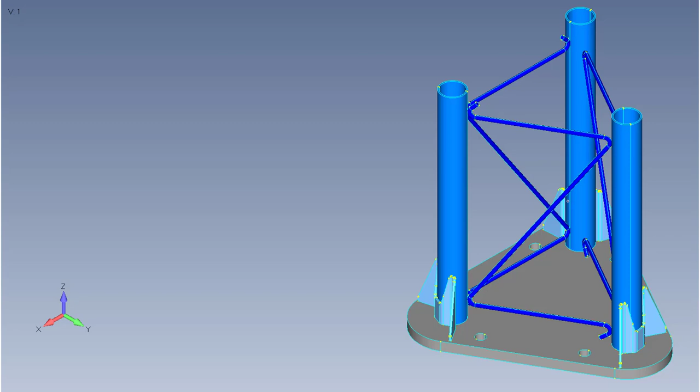In this video, I'm going to run through setting up a radio tower model. I've already imported the geometry. It consists of a solid base plate, some gusset plates that are welded to vertical tubes, and then a solid circular bar cross member that goes to each of the tubes.

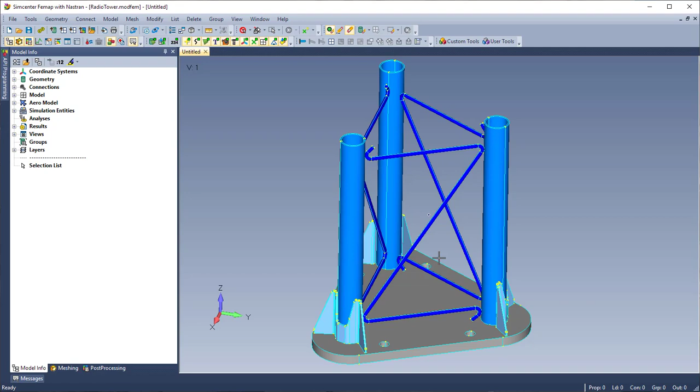So I'm going to mesh what you see here with different techniques, and then what I'm going to do is copy the mesh in the positive Z direction to get the length that I need.

The first thing I'm going to do is use the meshing toolbox to add washers on the holes of the base plate where the anchor bolts will be. I'm going to align the splits of the washers tangentially to the curves on the outside of the solid here, and this is going to help when I mesh later. I'll get a little better mesh quality, and also I can constrain around the holes more similar to what you would see in the real world environment.

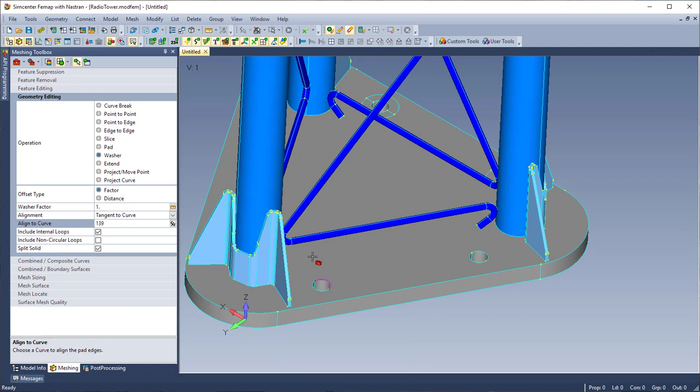So as I finish up adding the washers here, what you'll notice is that I turned on the split solid in the meshing toolbox, and that'll project the splits all the way through the depth of the solid.

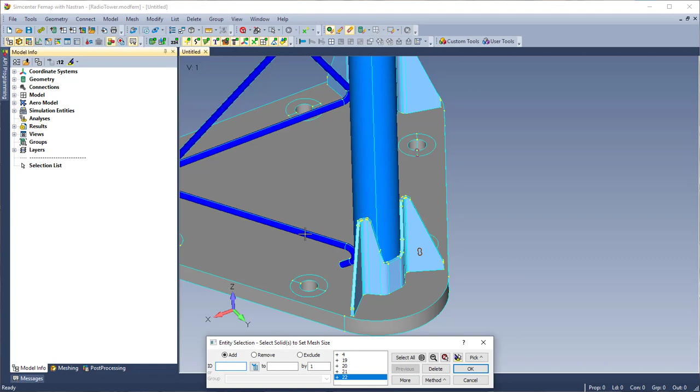So I'm going to go ahead and put a mesh size on the solid base plate. And what I'm going to do is select all the splits of the solid washers as well. That way, when I'm sizing this, the adjacent surfaces will be the same map, and I won't have to do a coincident node check later. The mesh will just be connected.

So I want the base plate to be a hex mesh, so I'm going to check hex meshing and set the size to 0.5 and also 2 elements through the thickness.

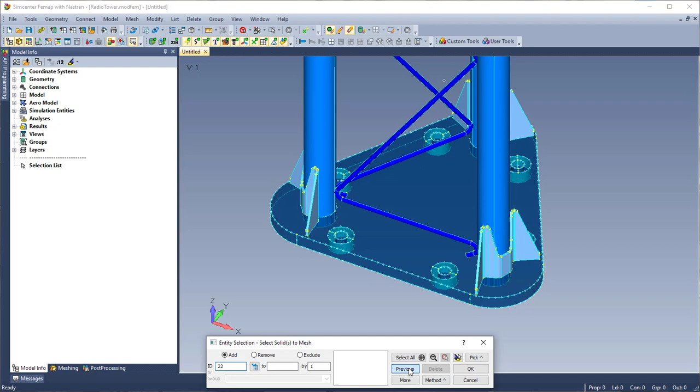Now I can go ahead and hex mesh my solid. I'm going to select previous, and that way I don't have to reselect all the splits of the solids. I selected steel for the material of the base plate, and I'm also going to use this for the gussets, the tubes, and the cross members for this example here.

So I've meshed my base plate here, and I'm pretty content. The quality of the mesh looks pretty good, so I'm going to move on to the gusset plates.

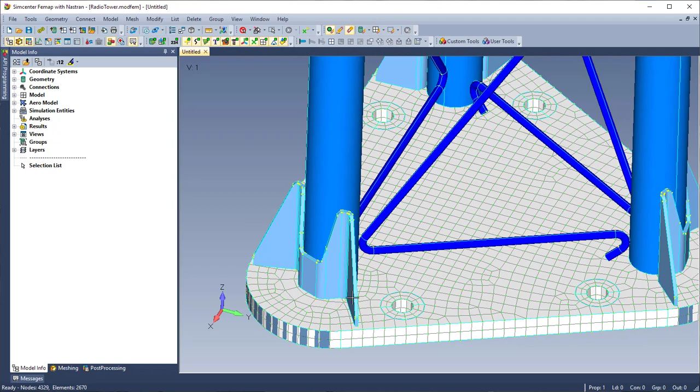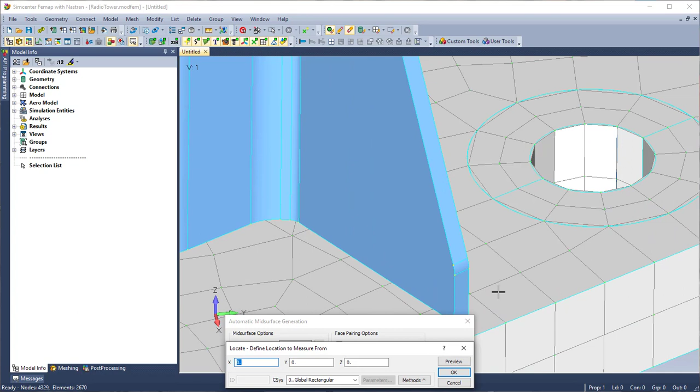I'm going to use the mid-surface automatic command, and in the entity selection dialog, I can use the on-solid method, and that way I can just select the one solid and it'll grab all the surfaces that are attached to it. I'm going to check on the combined tangent surfaces, and that's going to stitch all the surfaces that are created from this mid-surface. And then I'm going to use the measuring tool, and that'll automatically propagate the target thickness.

One thing I like to do is use the draw erase tool, and this gives me the ability to hide or show selected entities. So I erased the solid plate there, and now I'm left with my mid-surface.

You'll actually notice that when I did the mid-surface automatic command, it generates these mid-surfaces into a group. So then I can actually use that. Let's say when I want to size my mesh now, I can use from group and add those surfaces very quickly without having to go in and select all the different surfaces. So I'm going to size this to 0.2.

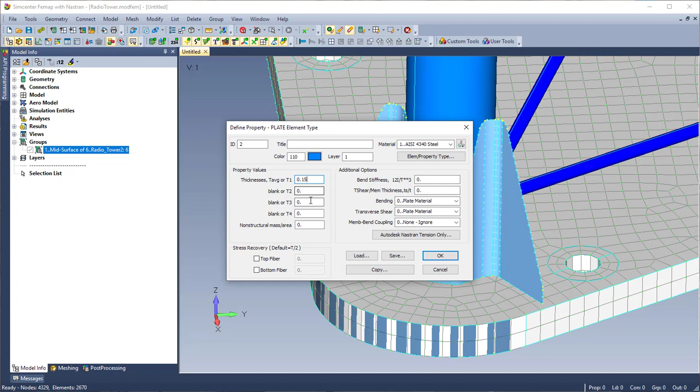And now I'm actually going to mesh the surfaces. I can just click previous now, and I'm going to create my property. If you remember from the mid surface command, I used the measuring tool to get 0.15 of the solid, so I'm re-entering that to create my plate property.

Overall, the mesh looks pretty good, but I do see a couple of elements that look like their quality isn't that great. So I'm going to use the meshing toolbox with feature removal and remove a couple of these miscellaneous points.

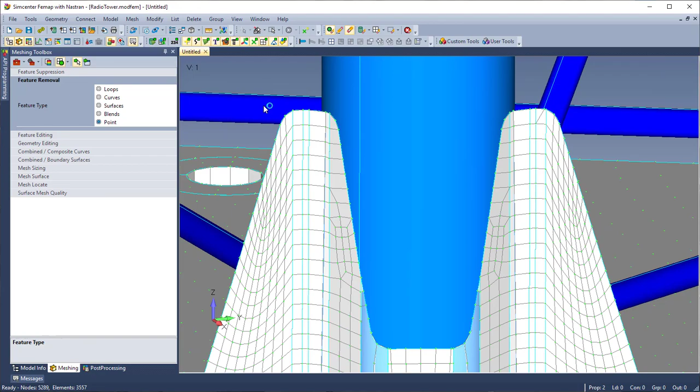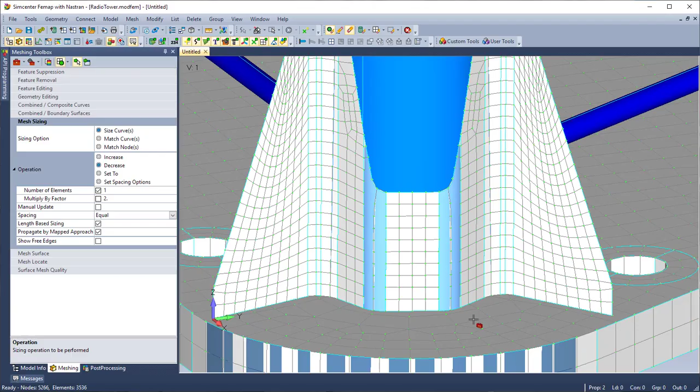I'm going to remove the 2 extra points on the top curve here, and that's actually going to create an uneven mesh size between the top and bottom curve. So I'm going to use the mesh sizing to decrease the size on the bottom curve, and that way I get a more mapped mesh on that surface for a better mesh quality.

So I meshed my base with solid elements and my gusset plate with shell elements, and now I'm going to create a glued contact property to mimic them being welded together.

When I create my contact property, I'm going to click the linear tab and set the contact type to glued, and just use the defaults.

So I'm going to create my first connection region, and I'm going to title this one base plate. And I can use the surfaces to go and grab the top surface of the base plate.

With auto repeat on, now I can create the connection region for the gusset plate. What I'm going to do now is use Elements. I'll title this gusset plate, and I'm going to hit add multiple.

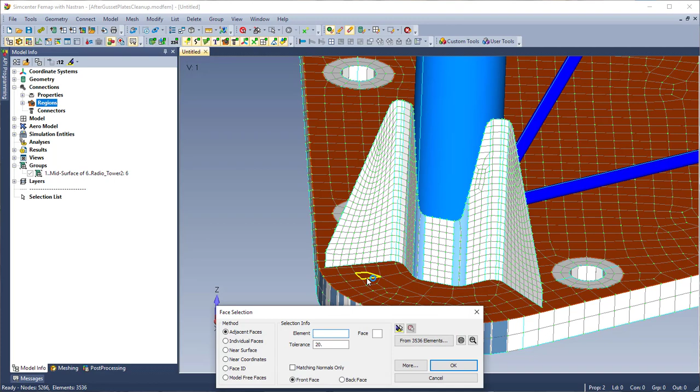I'm going to select one of the edges at the bottom of the gusset plate, and you'll see that with the tolerance set to 20, it doesn't grab all of them. So I'm going to bump it up to 40, and now you'll see that it grabs the whole edge.

Now that I have both regions created, all I have to do is create my connector. I'm going to select the property that I made, and the base plate as the master, and the gusset plate as the slave.

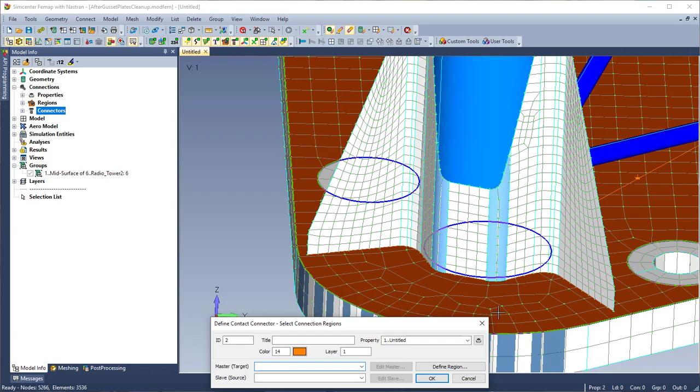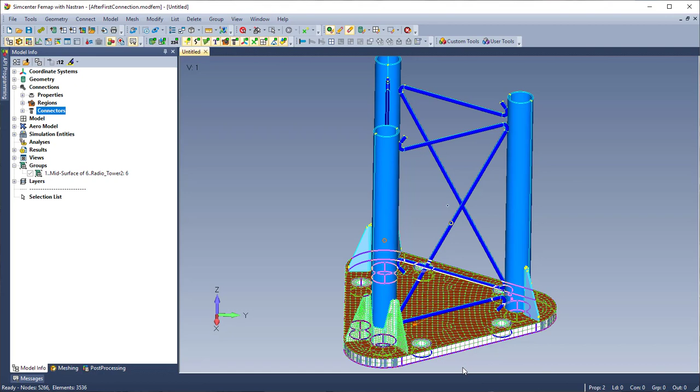The next step is prepping to mesh the vertical tubes and the cross members, and I'm actually going to mesh both of these with beam elements. Because I'm starting from solids here, I'm going to use the curve centerline command, which will allow me to select solids, and it's automatically going to create a centerline and associate a material and create the corresponding property with the cross section from each solid that I selected.

So I can hide the solids, and you'll see that there's a centerline created, and then I can expand the model info tree to show the properties that have been created.

I'm going to go ahead and mesh the vertical tube, and I'm going to start out by sizing it. I'll use an element size of 0.625.

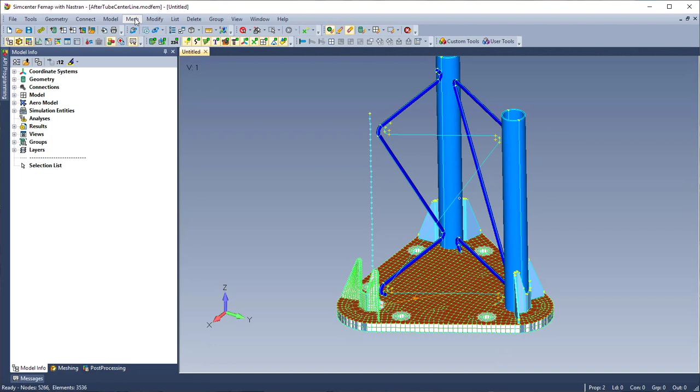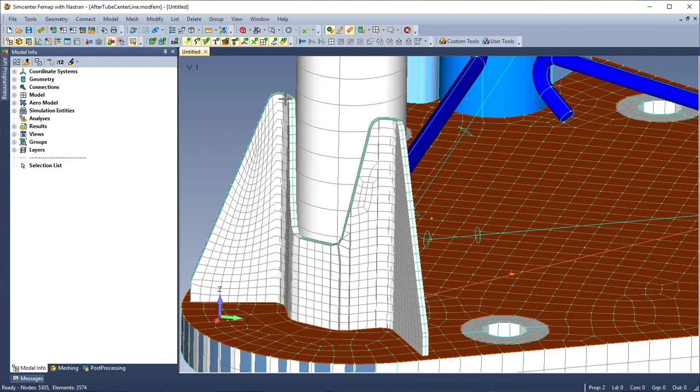Then when I mesh this, I can use the meshing attributes associated with it from when I used the tube centerline command. I'm going to turn on element thicknesses to get a good visualization of what's going on here. You can see, in the real case, it would be welded along the seams here, the tube to the gusset plate.

I'm going to turn off thicknesses again, and what I'm going to do is connect this using some rigid elements. So I'm going to use mesh connect closest link.

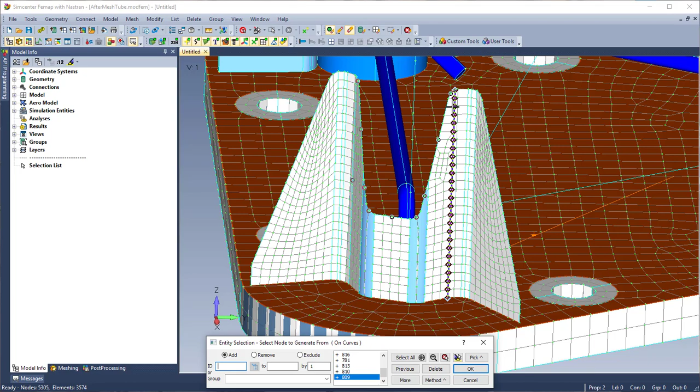In the selection dialog, to select nodes to generate from, I'm going to use the on curves method and select the curves that'll model the seam of where it's going to be welded to the tube. And in the generate to, I'm just going to select a couple of the nodes along the vertical tube in the area of where the weld would be.

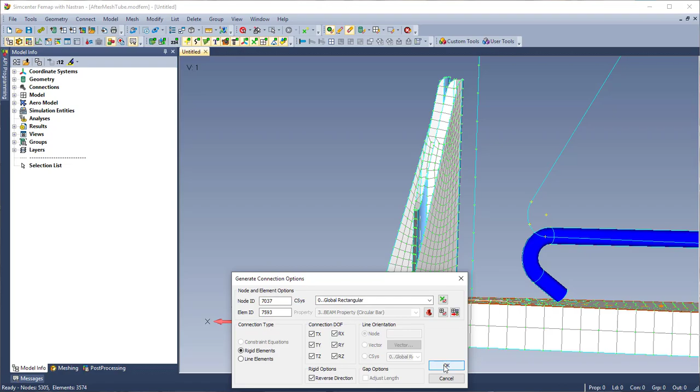I'm going to change this to the rigid element as the connection type and select all degrees of freedom. I'm also going to reverse the direction, because I want the dependent node to be on the gusset plate. So you can see now that my vertical tube is connected to the gusset plate. Again, it's just modeling the weld here.

You'll notice that I only meshed one of the gusset plates and one of the vertical tubes. That's because I'm going to do a rotation copy, and that's going to save me some time on repeating some of the steps I've already done, like meshing the surfaces and the curves, and also connecting the two with rigid elements.

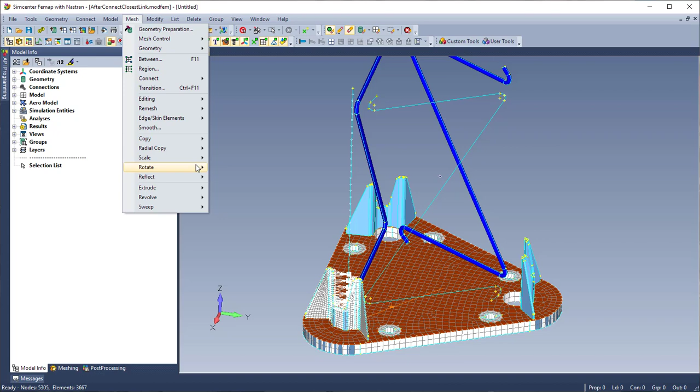So I'm going to use mesh rotate element, and in the entity selection, I'm going to use the method on surface to select my mid surfaces in that group.

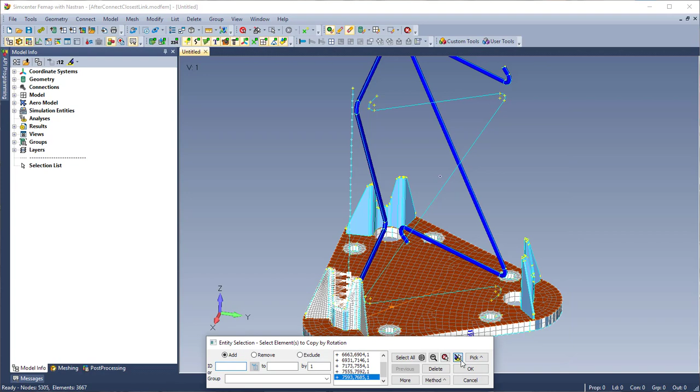Then I'm going to switch over to on curve and grab my vertical tube, and then switch over to ID and use the pick method to add connected elements, which is going to grab my rigid elements that I had created for the connection. Now I can see I had all the elements selected that I needed.

I can follow through with the rotation command. I'm going to make sure I have geometry and connections and regions turned on, and other entities to include. Then in repetitions, I'm going to change that to 2. Now when I'm prompted to select my rotation axis, I'm going to use a little trick here.

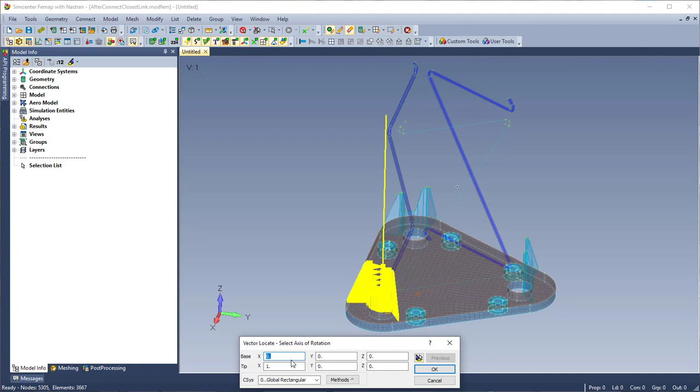I'm going to hit Control Z, which brings up a selection to pick a point. I'll use the center of gravity of surface method to select the top surface, then repeat that to select the bottom surface, giving me a rotation axis in the center of the base plate. I can then change my rotation angle to 120.

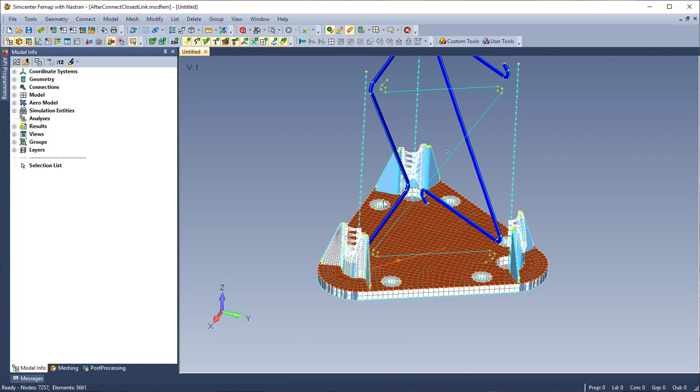I'm going to erase the other two gusset plates, and you'll see that with the rotation copy I did, I'm left with both the surfaces and the mesh. Because I chose to include connection regions when I did the rotate copy, the two copied gusset plates already have connection regions on the edges.

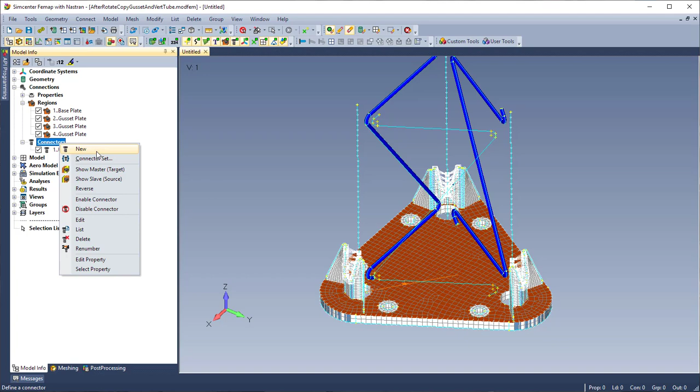Now I just need to create the other two connectors between the gusset plate edges and the base plate, so I'll go ahead and create those two real quick. Then, using my model info tree, I'll highlight the connectors just to visualize that they're all there. Now I can move on to my next step.

I'm going to create a new group here, and group the curves of the cross member center line. That way, when I go to mesh size this and mesh it, and also do another rotation copy, I can easily select these curves without having to select them all over again.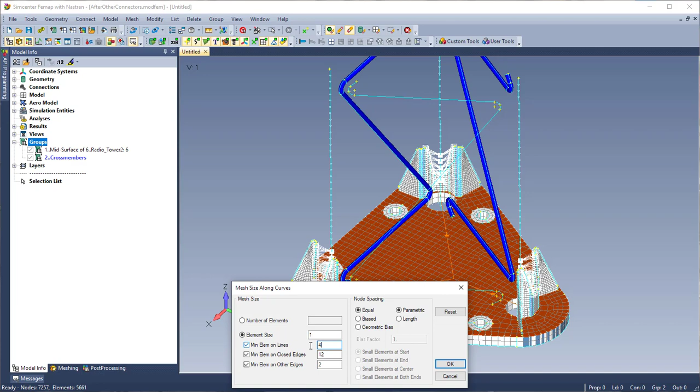I'm going to put a mesh size on the curves that make up the cross member—again, these are the center lines. I'll use my group to add those curves, and use an element size of 1. I'm also going to set minimum elements on a line to 4, so that on some of the curves or bends I get a couple more elements than if I'd just selected 1, which lets it follow the shape more closely.

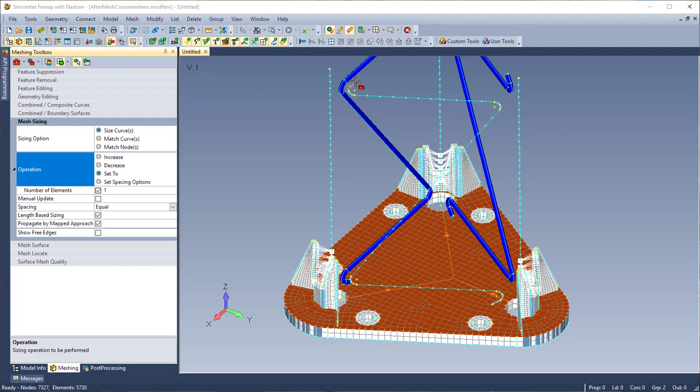Now I can mesh these, using the meshing attributes associated with the curves from the curve center line command. One last thing I'm going to do is use the meshing toolbox to size down the end pieces of the cross member again. I set the minimum elements on a line to 4, but I really only want that on the bends, not the smaller lines that make up the end pieces, so I'll set those to 1.

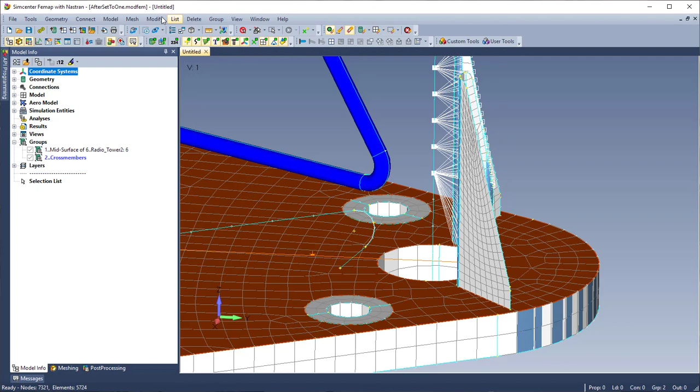Now that I have the cross member mesh, I'll turn on thicknesses and cross section just to visualize where the cross member and the vertical tubes line up—again, there would be a weld there. So I'm going to repeat my steps with the mesh connect closest link.

I'm going to select a couple nodes on the bend of the cross member, then for the generate-to, select a node on the vertical tube and use rigid elements, selecting all degrees of freedom, and again reverse direction.

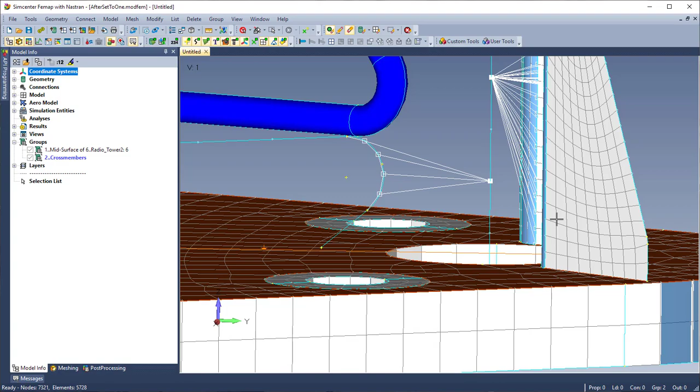I'm going to continue on and repeat that step with the three other bends on the cross member, so I'll skip ahead a little bit. Now, as you can see, I have it all connected to the vertical tubes with my cross member here.

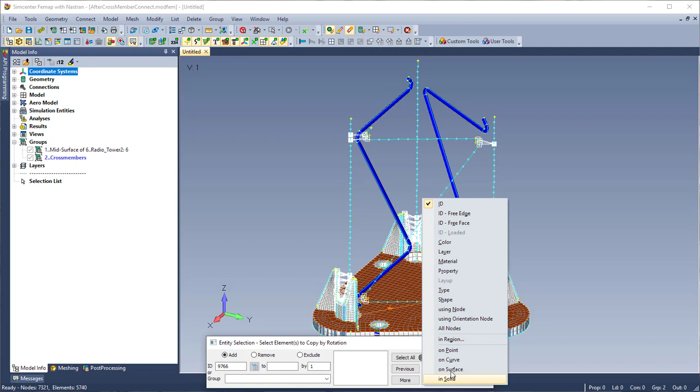Now I can do another rotate copy for this. I'll use mesh, rotate element again, and in the entity selection dialog, use the on-curve method and select my cross members group that I previously created. I'll highlight those, and you can see it grabs the elements on the cross members.

Now I'm going to switch over to ID so I can use pick and add connected elements, which grabs the rigid elements connected to the vertical tubes as well. So again, I'll switch my repetitions to 2.

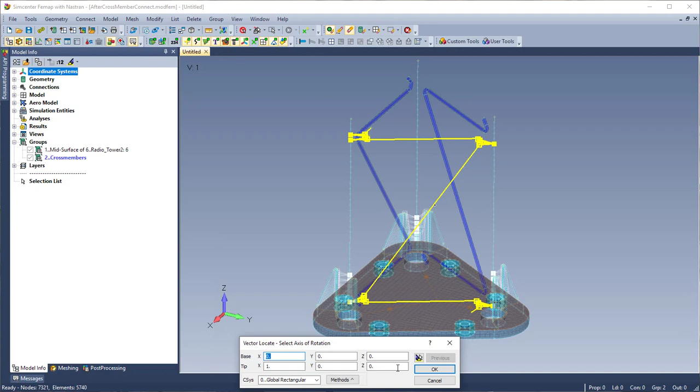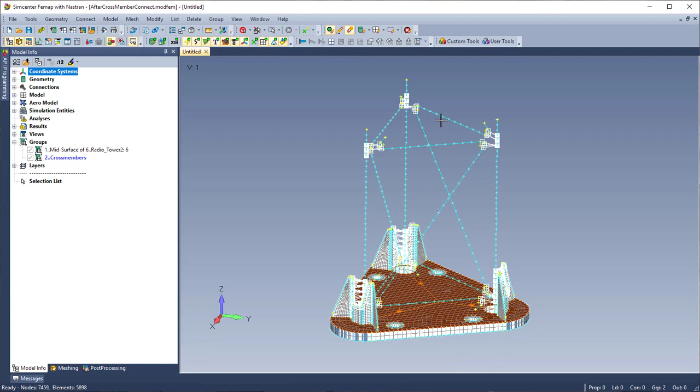Now I'll use my trick again, selecting the axis of rotation using Control Z, so I can select the CG of surface—the top surface and bottom surface of the base plate again—and change my rotation angle to 120. I'll go ahead and hide my solids from the other 2 cross members, and at this point I can see I pretty much have my mesh set up.

I'm going to turn off the mesh sizing on the curves here just for visualization purposes. And earlier in the video, I mentioned that I'd be copying the mesh in the positive Z direction just to get the height that I wanted. So I'm going to use mesh copy element. And the first thing I'm going to select is using on curves and select my cross members.

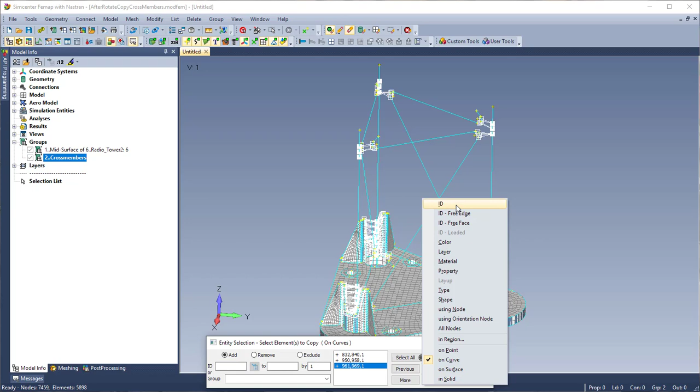And then switch over to ID. And again, I'm going to use the add connected elements. And that way I grab the rigid elements connecting to the vertical tubes. And I'm going to switch back over to on curves and get my vertical tubes. And I did it in this order, so that way when I did the add connected elements, I wouldn't get the rigids that were connecting the gusset plates to the vertical tubes.

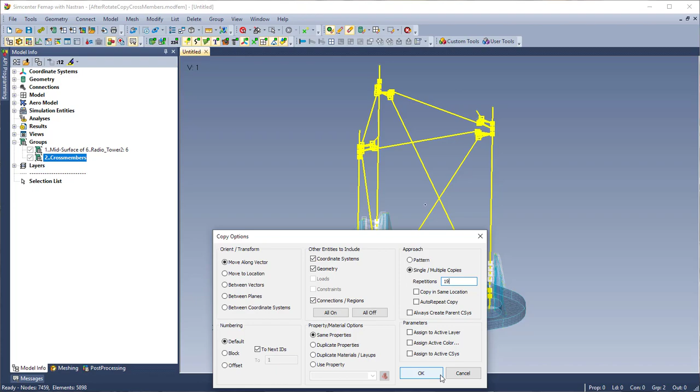And I'm going to copy this up 19 times. I'm just going to use along vector. And I'm going to select the base of the vertical tube and go up to the top of the vertical tube, and that way my mesh will align. So I've done my copy and I've got my tower to the length I need it to be.

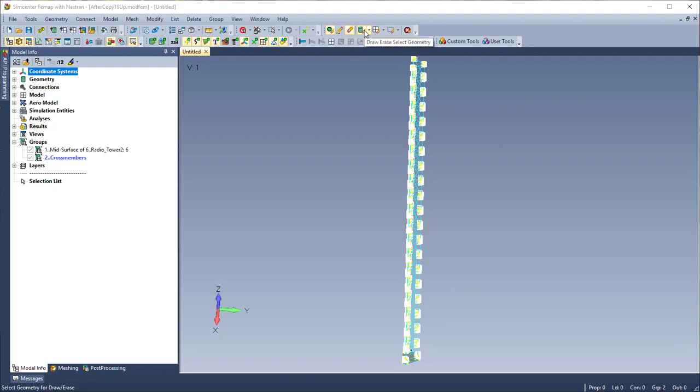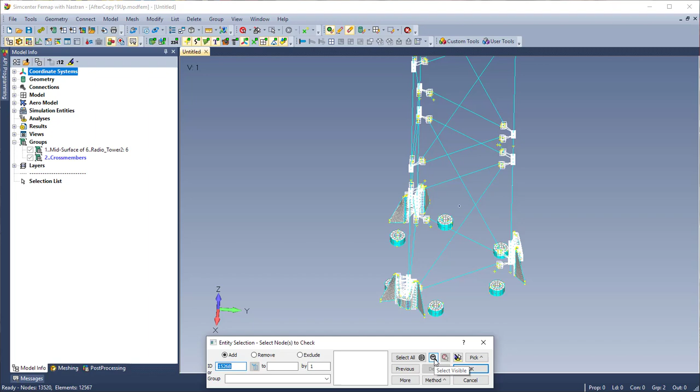So when I did my vertical copy of my mesh and even the rotation copy of the cross members, I'm going to have some overlapping nodes, and I want to merge those so everything's connected. So what I'm going to do is actually hide the base plate solid and with it the elements, and that way when I do my tools check coincident nodes, in the node selection dialog, I can actually do a select visible, and that way I'm not going to merge any nodes that may have been coincident between the gusset plate and the base plate.

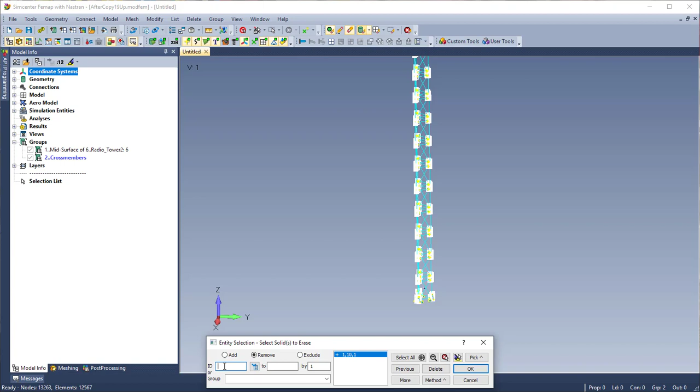And so you probably noticed a couple rigid elements connected from the cross members to the vertical tubes, and also the vertical tubes that were copied straight up had some coincident nodes. And so I just went back into my erase selection, and I'm actually removing solid ID 1, which is my base plate, so I can see that again.

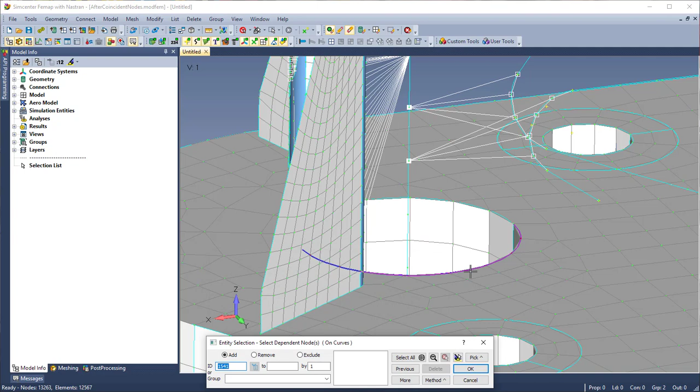So the last thing I'm going to do here is create a rigid connection between the vertical tube and the hole of the base plate where the tube would slot into, kind of mimicking a weld between those two. So I'm just going to go ahead and create a rigid element, an RBE2, and grab the nodes on the curves of the hole for the dependent. And as the independent node, I'm just going to select one of the nodes on the vertical tube. And I'm going to repeat those steps for the other two tubes.

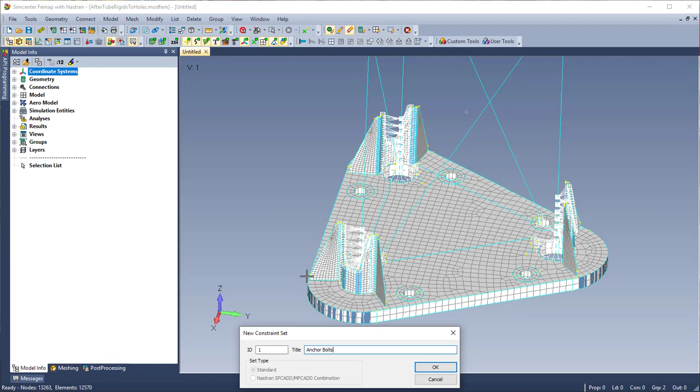So I have my model completely meshed now. I'm going to go ahead and set up my normal modes analysis. So I'm going to go ahead and create a constraint on the surfaces of the washers that I created earlier. It's going to prompt me to create a new constraint set. We'll call that anchor bolts. Again, I'm just going to go ahead and select the top surfaces of the washers and the inner ones. I'll continue on with this, but I'll skip ahead a little bit.

So I'm going to highlight here. I have all my washers selected. And then I'm just going to use a pinned no translation constraint. So now I can go through the model info tree and just right click on analysis and hit manage. And I'm just going to create a normal modes analysis. Again, because my constraint set is active, it automatically grabs that. I can kick this off and fairly quickly I have my results read in.

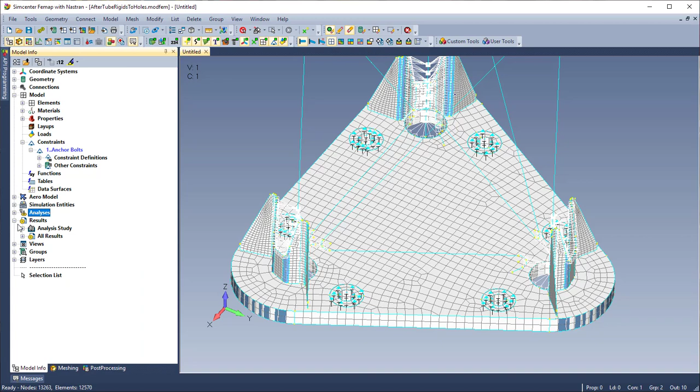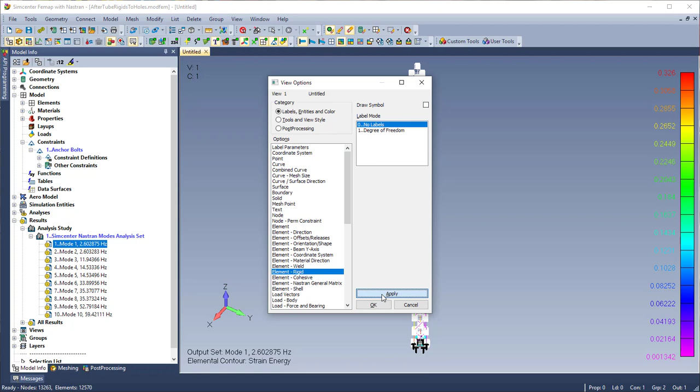So I'm going to run through the mode shapes real quick. I'm going to turn on my contours. We'll turn off the geometry. I'm going to zoom out a bit, and you can see all the symbols from the rigid elements. So I'm going to go ahead into view options and turn those off. So the hotkey is F6. And then I'm going to go into element rigid and turn off draw symbols. And now I can show the animation of the different mode shapes.